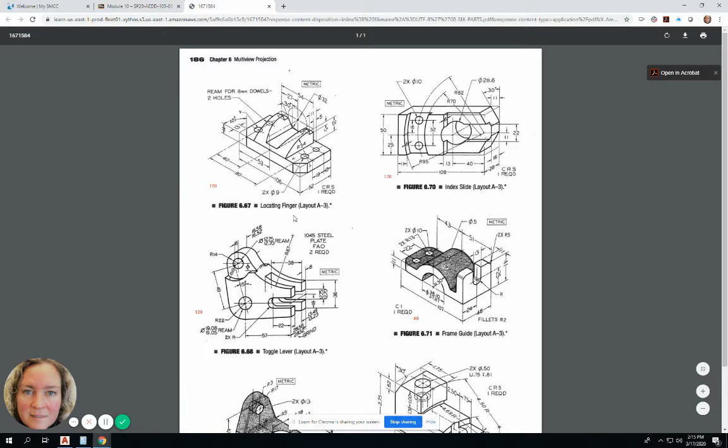So if we go back to our 6 parts, the locating finger, index slide, toggle lever, cutoff holder everybody's doing, and the chuck jaw, and then the frame guide is the least challenging. So there's really 2 things you're going to be doing. You're going to determine how many views each one of these objects needs, and I'm going to give you a clue to that right now. And then you're also going to apply dimensions to these objects.

But the challenge is when you dimension something that's in an isometric format, the dimensions will not appear in exactly the same way in your multi-view drawing because there are some rules and standards to follow. So I'm going to break this up into a couple of videos, but let's start off with understanding how we would select our views.

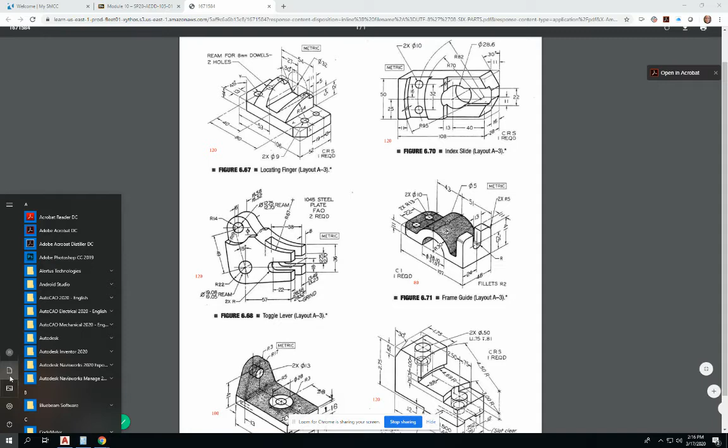So I'm going to open up a PowerPoint, and I'll make sure the PowerPoint is also included in the lecture material. But for now, I'm just going to grab it off of our server. So I want to look at orthographic projection.

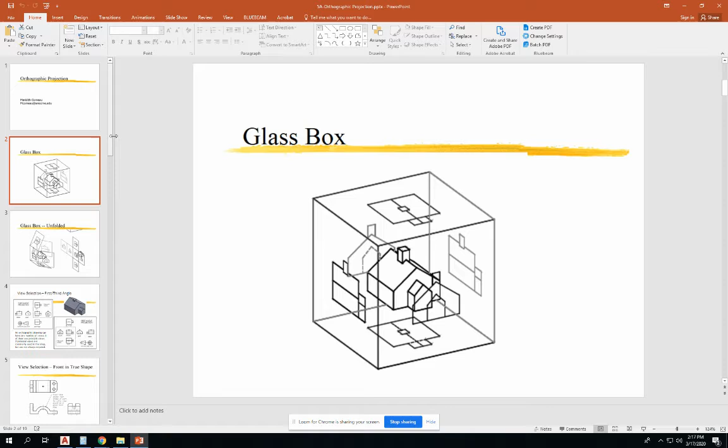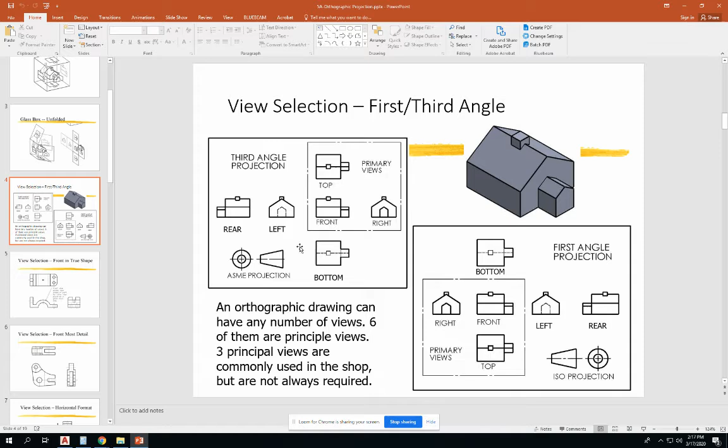In orthographic projection, we learned that each view belongs in a certain position. The rod support, for instance, we set up views that are front, top, and right side views. And the other kind of projection that we see in other parts of the world is first angle projection. So you'll notice some familiar shapes here. This is going through the ways that you pick out how many views something needs and what should be its primary view. So this is the frame guide, and this is suggesting that we would put the views in this order.

This would work okay, but one of the problems I have with this particular order is that one of the features that we're trying to see and add dimensions to is this arch right here in this right side view. I'm not able to see it very well with the way that things are laid out. So what I would do is take this view and mirror it in the opposite direction so that these 2 views are facing opposite directions, and the arch is showing in its true shape in the right side view.

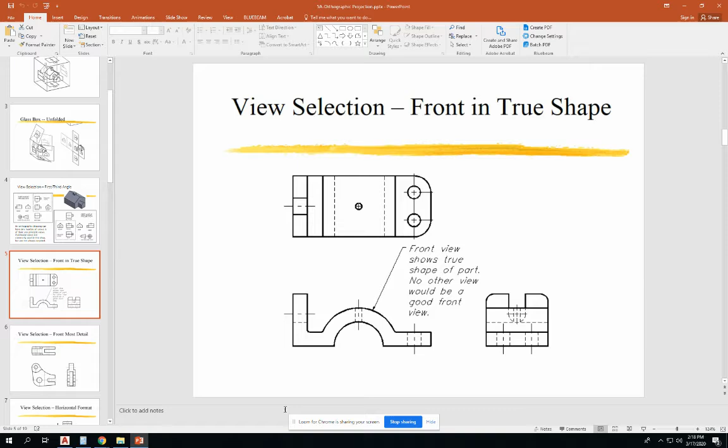So this is what that would look like. My suggestion is we do something like this instead. You see that the information in the top and the front view is the same, we're just seeing it from the other direction. But the way orthographic projection is set up, this object now gets turned. So we're looking at it from this direction, and we're able to see the end of the frame guide where we can see the feature clearly without it showing up as hidden lines.

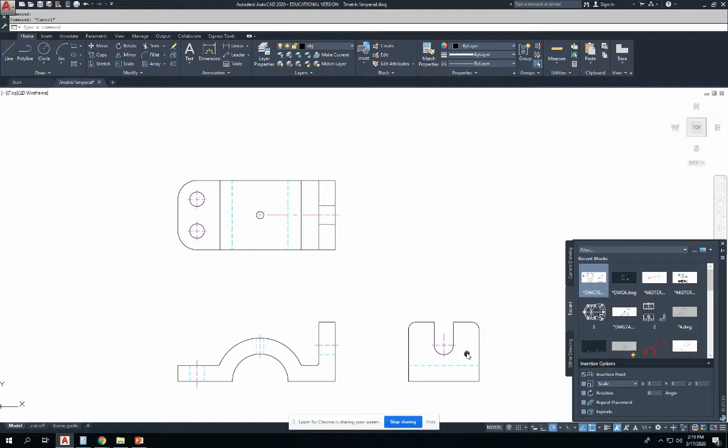Notice too that I'm not including the object line information or the additional hidden line information past this point. If you can imagine there's an imaginary line right here where we can't see past that plane, we're ignoring that information, and this is called a partial view. But everything else you see here would be set up properly.

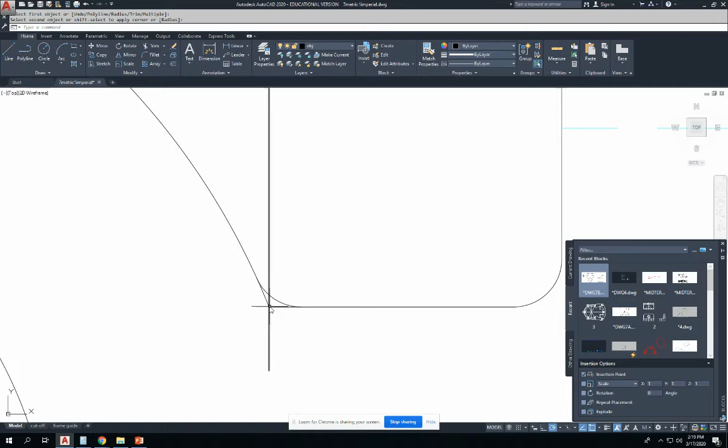You can see that the lines that we draw here are going to be projected from where these two lines would have originally intersected. So I have a fillet here, but if I actually intersected this line with this arc, this is where that intersection would be, and that's where I projected the top line to in this top view.

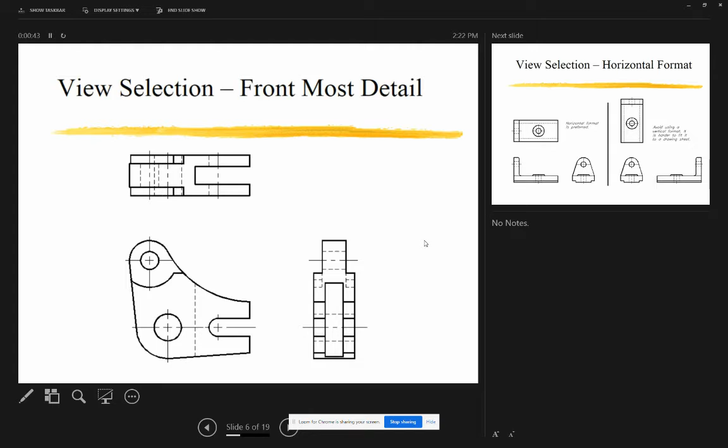And if I project from where, again, this arc hits the edge of this part, if I project up like this, I'm going to see where that line would actually end. So there's a lot of little fussy things that you're going to have to pay attention to, to get it to come out correctly. All right, so let's look at the next slide.

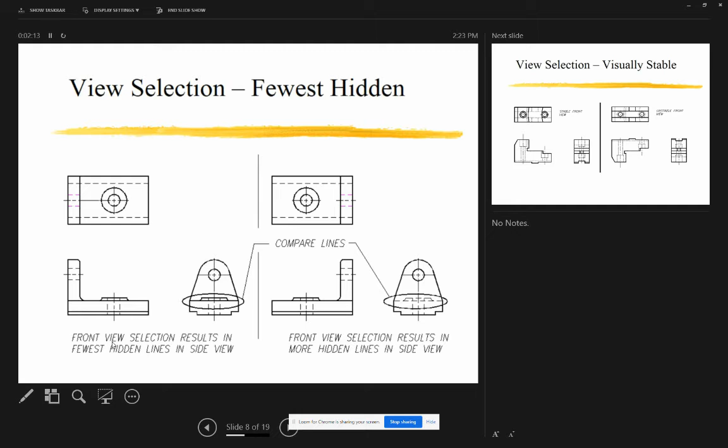So unless we decide to show this as a partial view and get rid of all of those hidden line features in this view just to show what's going on with the hole, then it's possible that we can make the argument that this would work. But this is a better choice in this example because of how simple the part is.

So I wanted to go over that and revisit orthographic projection. So to recap, these slides are indicating the 5 things that we go through to determine a best primary view, and how, after you've picked your primary view, that sets up what this view is going to look like and what that view is going to look like, because we simply turn the object and flip it to see the object in the other views. So keep in mind how important the primary or front view is.

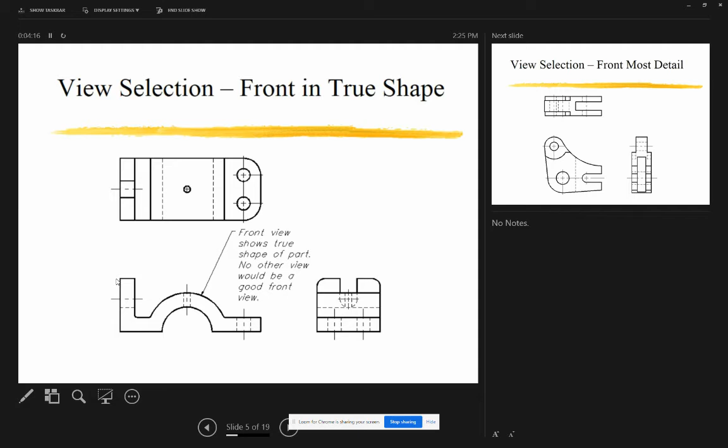So this one, true shape, means the most information about the object is showing up here in the true shape, most detail. Horizontal format, fewest hidden lines, and view stability are the things we look at. And that's how we arrive at what's the best choice for me to pick for a primary view.

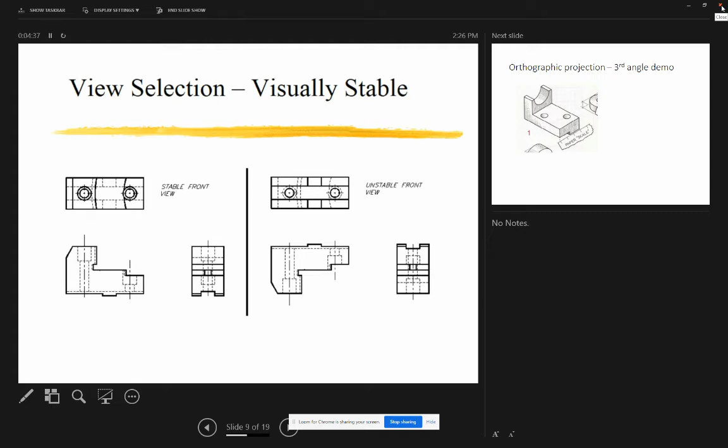The object that we didn't look at in this example is the index slide, so I'm going to go to that now. With the index slide, that's one of the objects where you could make the argument that we really don't need a right side view. And if you are curious, go ahead and project that right side view. I'm going to put on a construction layer and show you. I'll just use the demo layer for now. We'll use a miter line. Make sure that that's at a 45 degree.

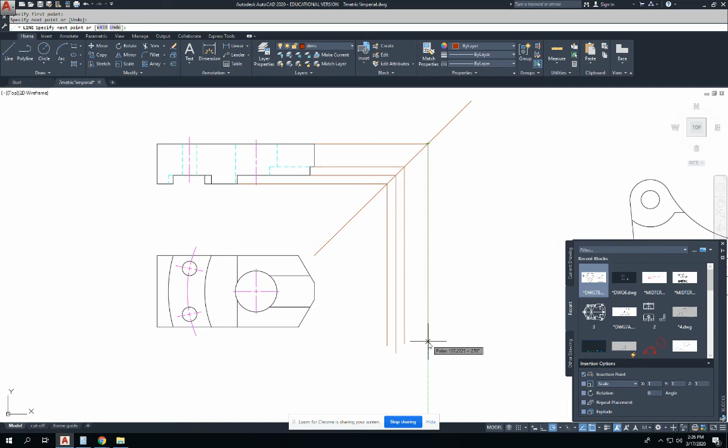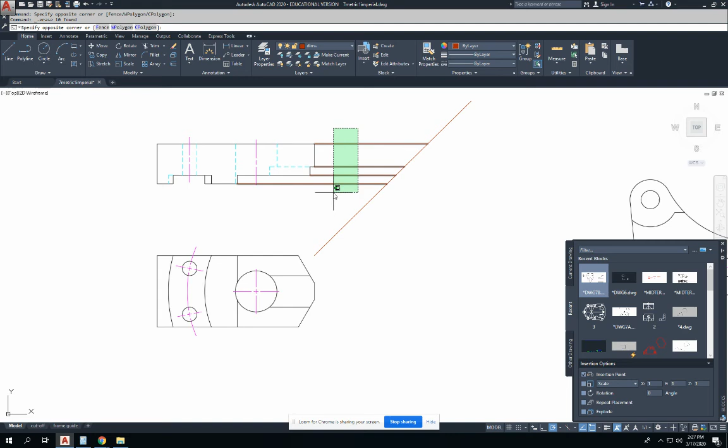If I just start to draw lines here to indicate what is going to happen in this right side view, you'll notice that we end up with some information that doesn't really help us out a lot. Nothing is really being shown in its true shape. So that is what we end up with for a view. If I fill this out and show what would be object lines and hidden lines, you'd realize there's nothing going on there that helps us with anything we need to add dimensions to, or to help us with manufacturing or building the part. So in this particular example, we only need these 2 views.

Now, in the index slide, we also have some projection things that we have to pay attention to. Once you draw this primary view the correct way, you need to project the quadrant of this arc to find the hidden line. And then you also need to project where the arc hits the edge of the object to find that object line. However, this arc is in the reverse direction, where the quadrant is the object line, and where the edge of the arc is also going to be an object line. We're seeing a little bit of surface area of that arc here in this top view.

Hidden lines are projected from the holes that we have here, so we can see that that quadrant right there lines up with where this hidden line is. And these 2 object edges here would create a hidden line here. And we have a hidden line here that's lining up with this edge of the circle. This little cutout that we have here is a result of us projecting from this edge to find the edge of the raised surface here, and then the actual edge of the frame guide.

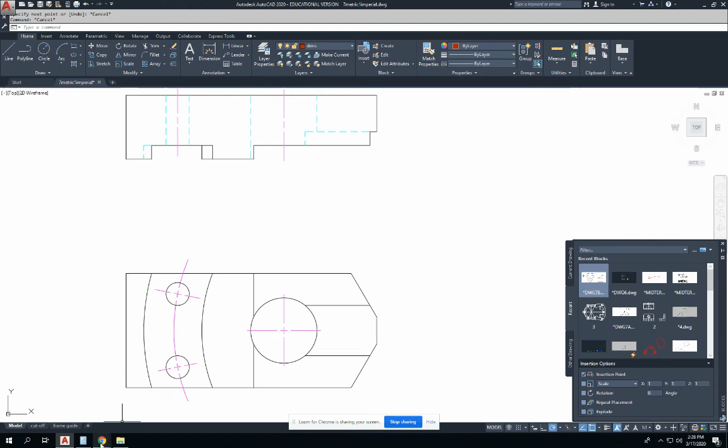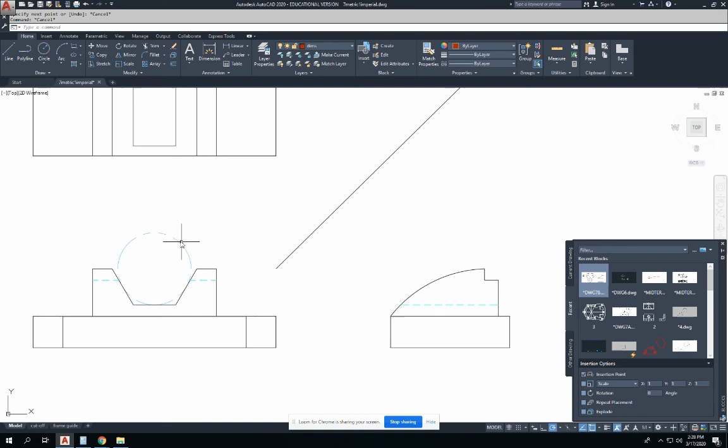Some of the dimensions that are shown can be confusing when we look at these drawings in isometric format. I will point out some misconceptions people have. For instance, this locating finger is not angled back here. What it looks like is this. So we have a flat edge. The angle you're seeing is a result of this circle being a radius or diameter of 32, I can't remember. And then you notice that the lines on these three sides of the circle are tangent to it.

If I were to turn that into a hexagon, I'm giving you guys clues here, turn it into a hexagon with 6 sides, and I made it a circumscribed hexagon. Do you see that it ends up being the bottom half of the hexagon down here that defines that part of the frame guide? So I could create a hexagon and trim it to the height here, and I'd end up with the shape that I needed.

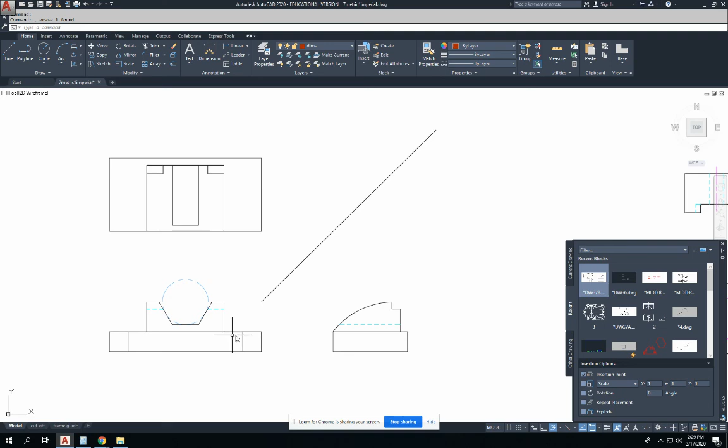Now up here I left this blank because I'm going to show you in a new video what that's going to look like. So I just wanted to make you aware of some of the little ins and outs of some of these drawings and things that you're going to have to look for, and how to interpret and read those dimensions. So take a look at some of the additional lecture material. I'll go over each object to show you some specifics that you need to know.